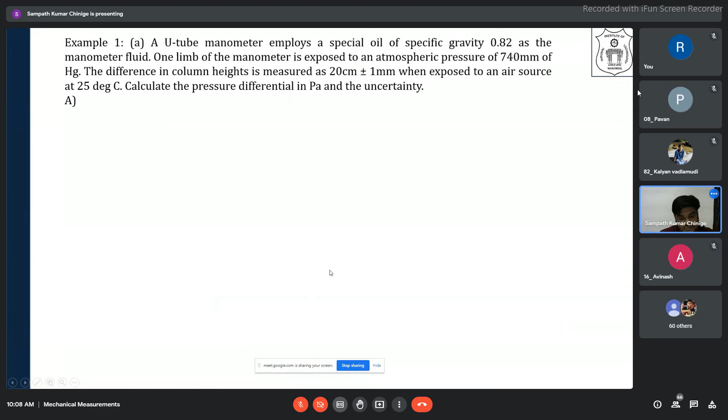Okay, so now any questions related to yesterday? Anybody? Please feel free to ask. Let me record the case. Please don't be silent, talk something. If you understood it, say that. Sir, you haven't shared the slides. That's true, but whatever you heard, you might remember, right?

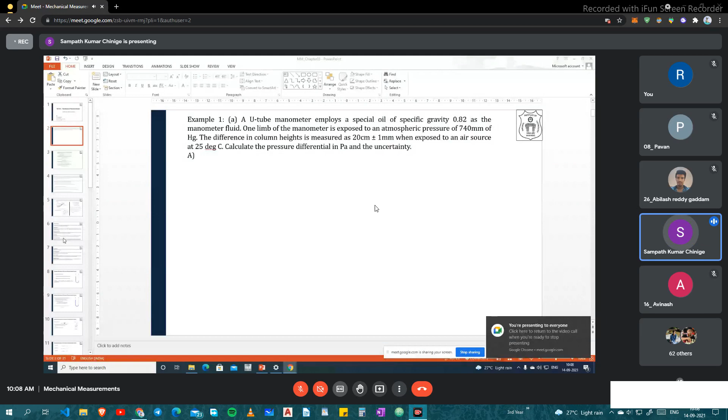Don't you remember what was taught in the last class? That's fine. If you don't remember, also that's fine. So I was talking about the working principle of the dead weight tester. Have you understood the working principle, how it is working for a calibration of any pressure instrument? Yes or no? Just for your sake, you tell me.

Somebody, don't wait for others. Those who have understood, at least they keep quiet, and those who never understood, you can say that I haven't understood. Okay, at least I can send the link. Please don't do so. Or those who understood, they say yes, one or two, that's fine. We'll go ahead. Okay. Can I take that you understood that?

And then the U-tube manometers, the manometric fluid we are using and balancing to find out the differential pressure. Have you found out that? Have you understood that?

Yes, sir. I request you people, don't be silent. I mean, it doesn't make any sense to me. You were talking a lot in the previous classes. Whatever you want to say, you tell from your side. Don't wait for others to answer. Okay? Have you understood? That's fine. If you have not understood, I can recap once again. No need?

No, sir. Okay, fine. So we ended up solving two problems yesterday. One is this problem: a U-tube manometer employs a special oil, with a specific gravity of 0.82 as the manometric liquid. One end of it is exposed to atmospheric pressure of 740 mm of Hg, and the difference in column heights is measured to be 20 centimeters plus or

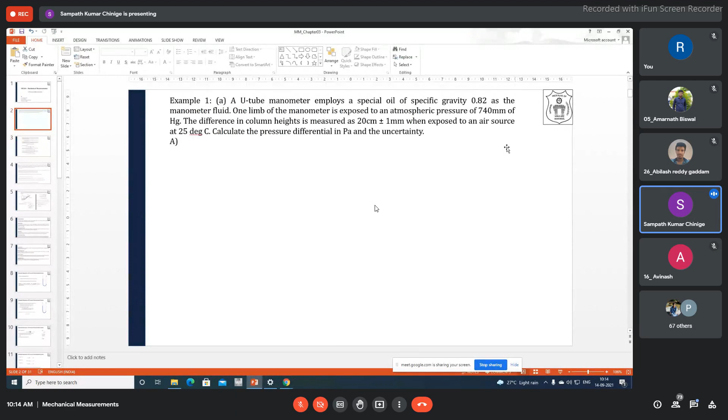Because in the question, we are finding out atmospheric pressure, and the other source is an air source. Therefore, you have to find out the density of air, rho air, that is 1.15. This we have got from finding out the actual pressure in pascals, and then we are using this ideal gas equation to find out this.

And then you have given the column height as 0.2, so substituting everything, P minus PA is equivalent to rho m minus rho f, that fluid, into g into h. So that is giving around 1598.5. If you put 9.81, it will be close to 1600, whatever it is. So whenever you are solving such problems, please mention these things clearly.

Okay, so the uncertainty calculation is straightforward. It is the same as the percentage uncertainty in the column height. So whatever the percentage variation in the height, the same will be conveyed in terms of your actual pressure difference. So the percentage difference in height is, for 0.2 it is 1 mm, that is 0.001. For 100, how much? It is plus or minus 0.5%.

So the pressure difference error delta P will be nothing but plus or minus 0.5 by 100 into whatever pressure difference we have got. So that is basically 7.99, which is close to plus or minus 8 pascals. So that is what the problem is. So I think you are clear with this.

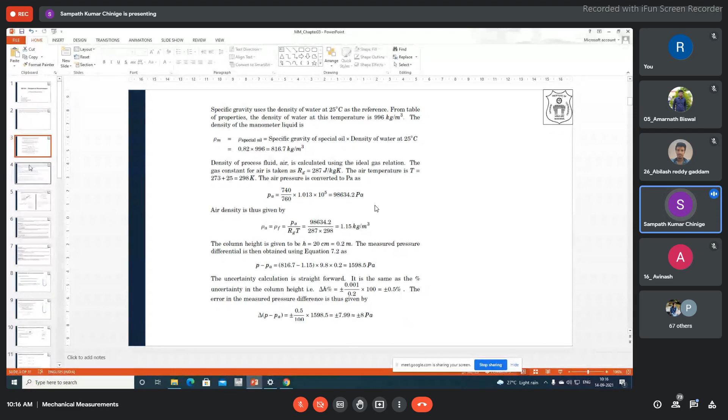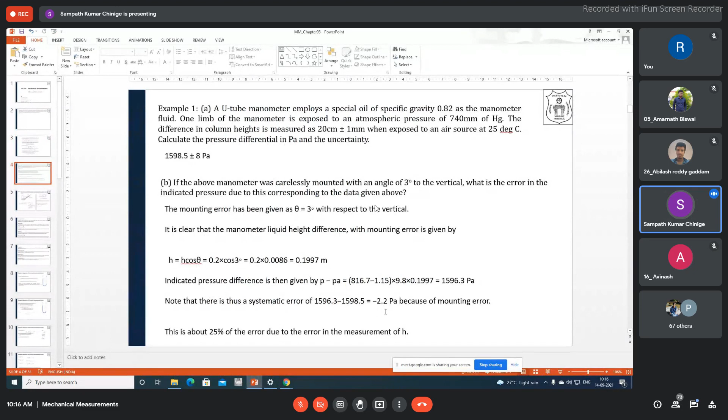And then the second problem, we have already solved it. When it is 3 degrees, we have to find out the height h is equivalent to h cos theta, based on the inclination. So from that, you got the pressure difference of 1596.3. When it is vertical, using cos 0, you got 1598 point something. So the systematic difference is 2.2 pascals because of this mounting. So I think you have got this problem.

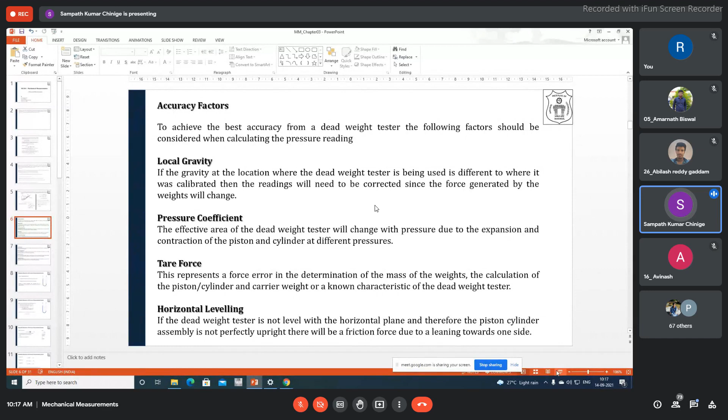Okay. Now today in our class, what you have to look at while using the U-tube manometers are the accuracy factors. Even when you are using the dead weight tester, you have to be very careful about the following factors. Number one is the gravity. Suppose you are testing your pressure gauge at one place where the gravity is different, and you take it to some other place where the gravity is different, then we will get some error, because gravity will have some effect on this.

Okay, because the force generated by the weights will automatically change. So therefore, the local gravity has to be the same. So when we are doing calibration, you have to do that calibration at the same place where you are actually using your experiment. Am I clear? So you cannot do calibration in India and then go to the Arctic and Antarctic poles and use the same calibration, because the gravity differs there. Okay, second one is the pressure coefficient.

The effective area of the dead weight tester will change with pressure due to expansion and contraction of the piston and cylinder at different pressures. So this is also one of the important things, where we have the effective area of the dead weight tester. What will you use the effective area for? So you are keeping the weights, right, on the base. How do you change that?

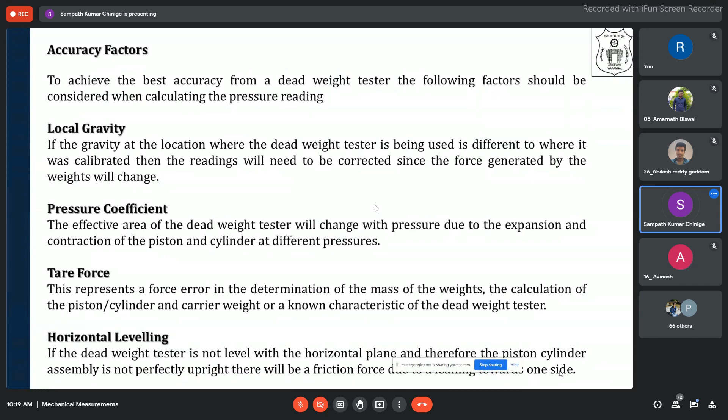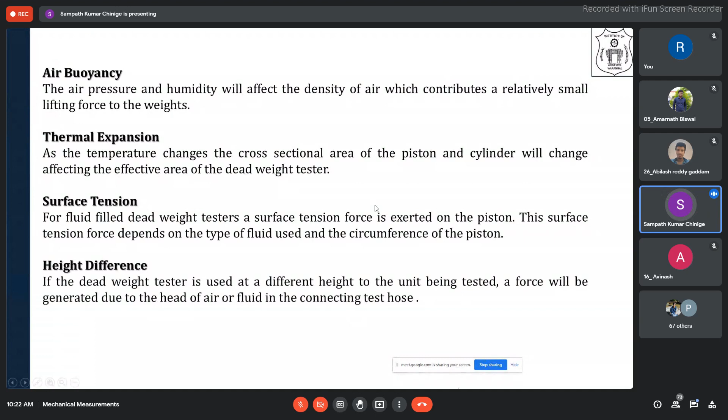Now let us move on to the next topic, what we call the dynamic response of pressure measurement systems. So far, what we have seen in the previous section is static, steady state measurement of pressure. We don't take the reading immediately; we wait for some time after the measurement starts, and only after that take the measurement. That is basically your steady state measurement. But how do these measurement systems behave in the transient? What is the dynamic response based on time?

For that, I'm giving you a small example of a simple instrument, what we call the U-tube manometer, where the transient response depends on several factors. One is the response of the transducer element that senses pressure. So it may be a sensor or whatever.

The first element, which actually senses the pressure: it depends on the response, how good it is, how sensitive it is. If it is very sensitive, for a small change of input it will give an output. So depending on that, its response will vary.

Second one is response of pressure transmitting fluid and then tubing. So whatever the fluid that I'm using within the instrument to transfer the signal from that sensor and continue to the other end. And what is the tubing, what is the interaction between the fluid and the tubing? How is this actually supporting the transformation?

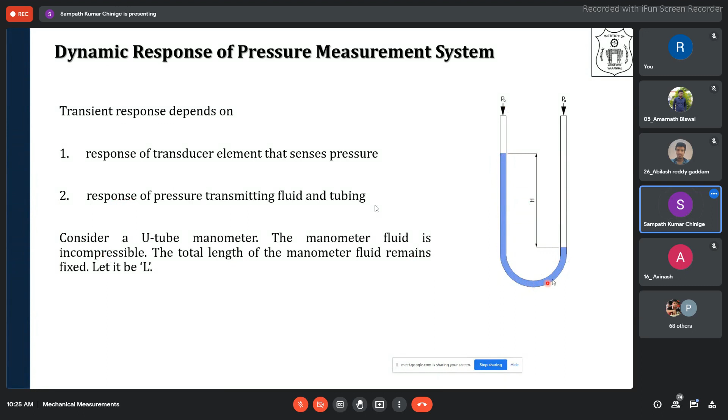So we will be just looking at a U-tube manometer, in which the manometer fluid is incompressible, that is the assumption, and the total length of the fluid manometer remains fixed. So the length of the total, not the variation in the height, from here to here, if you take it in a linear line, the total length of this column is capital L. And the difference in these heights because of the difference in the pressures is capital H, let us say.

So now let us understand what are the pressures that will be applied on the liquid column L. When pressure delta P is applied, what can be the forces that will be acting? What are the supporting and what are the opposing factors for the pressure? So the forces acting on the liquid column L: number one is the force due to acceleration of the fluid.

Because of this acceleration, there is some force that is being applied. You are connecting it to a tube and the water rushes with some force because of the acceleration. So it is the force due to acceleration of the liquid, introduced into the system. Correct? Agreed? And the second one is force supporting the change in height. There is a force which actually creates the change in height; I'm taking it as Fs.

The third one is force opposing the change. Again, there is inertia to the liquid which actually tries not to change the level of the liquid, opposing the changes because of the force. One is the weight of the column. So the weight tries to stop, it tries to balance the force.

The other one is the frictional forces due to viscosity. So what is the friction that is happening between the tube and liquid as well as the liquid layers itself? This will also oppose the fluid. So the more viscous the manometric fluid is, the more opposition it shows for the force. It will not easily move. It will not easily show the difference in the vertical height.

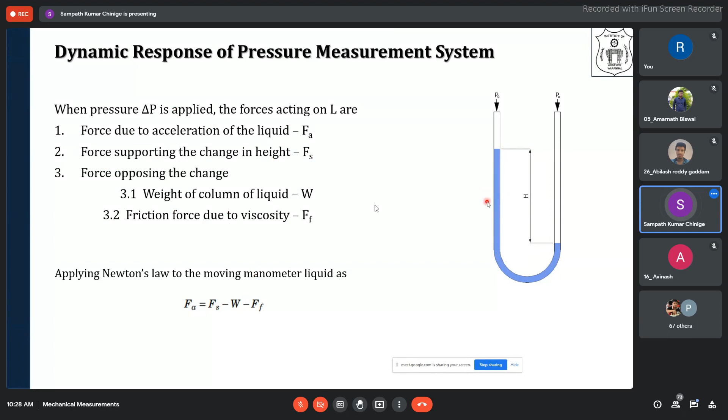Because of the rushing of the fluid, because of the high change in velocity of the liquid, it is creating some force. One is actually trying to change the length, the other one is its weight which is opposing, and the other one is viscosity which is opposing. Therefore, the force due to acceleration of the liquid FA is equivalent to the force which is supporting the change in height, minus W opposite force, minus F opposite force. So let us look at one by one.

So the first one is FA, the force due to acceleration, given by M into acceleration, right? Can we take it as M into A? Density is equivalent to mass per unit volume. Therefore, mass can be replaced by density rho m into volume. What is volume? Area of the tube into the length. So that is the volume of the liquid, right? So that is what I have written.

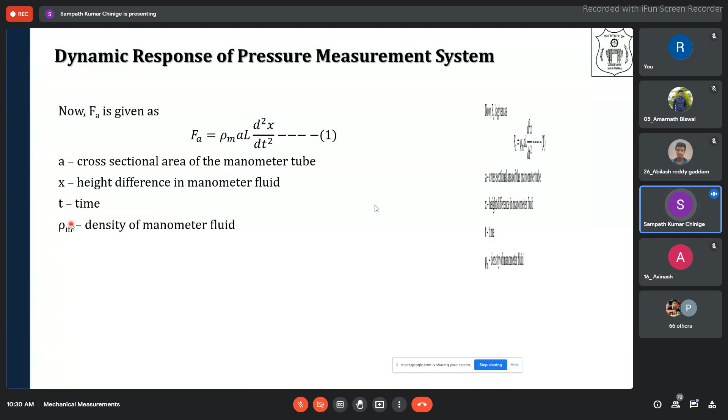Rho m A L, that is m, into d square x by dt square, which is nothing but your acceleration. Acceleration is equal to dv by dt, velocity is displacement by time. So it is nothing but d square x by dt square or d square h by dt square. So the definitions are written over here. Okay. So I have defined the first thing, the force due to acceleration of the fluid is equivalent to rho m A into L, that is my mass, into d square x by dt square, which takes care of the acceleration. So Newton's second law I have written.

So next one is Fs. What is the force which is actually creating that change? It is nothing but the pressure, right? The change in pressure is equivalent to the force per unit area. So I am writing Fs is equivalent to the area into delta P. Agreed? Okay. So delta P is Fs by A. So I am taking Fs is equivalent to A into the pressure difference. That is what is actually creating the change in height. So I have defined Fs.

Next one is W, the weight of the body, which is nothing but, as we have talked about, m into g. So therefore, rho m into Ax into g is the weight of the liquid, where it has a change, rho m A into x, or h, whatever the difference that we are taking, that is the weight of the liquid.

And viscous forces, this is like the area into delta Pf, where this pressure difference is due to the frictional force. How do you find out the frictional force? In your fluid mechanics, if you remember, we have used Hagen-Poiseuille's flow law, where you are finding out the equation for delta P. If it is a fully developed flow, what is the pressure difference, or the friction across the pipe? For a fully developed flow, it is given by Hagen-Poiseuille's equation. So that delta Pf is what is being incorporated over here. All right.

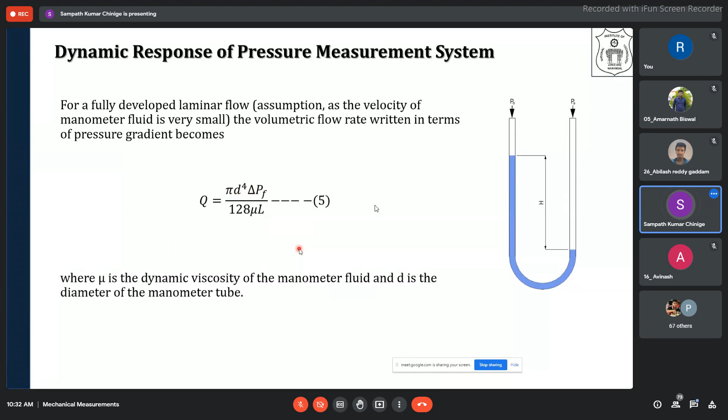Okay. So now here mu is the dynamic viscosity of the manometric fluid and d is the diameter of the manometer. So now what happens to the mass flow rate? What is the expression for mass flow rate? Mass flow rate expression is nothing but Q is equivalent to area into velocity. Okay. So your area into velocity will come into picture. So therefore,

you are writing like mass flow rate is equivalent to rho m pi d power 4 into delta PF by 128 mu L. Okay, so this is what its mass flow rate we are getting. Rho AV, mass flow rate is equivalent to rho into AV. Sorry, mass flow rate is equivalent to density into area into velocity.

What is area into velocity? That is basically your discharge. So that discharge is given here. Okay, this discharge I'm substituting there, multiplying with the density of the manometric fluid. So rho A into V, which is equivalent to rho into Q. That is my mass flow. So that is the difference. So when the discharge is multiplied by the density of the fluid, we will get the mass.

Therefore, delta PF in terms of mass flow rate, if you want to give, m dot 128 mu into L by rho m pi d power 4, where mu is the dynamic viscosity, d is the diameter of the pipe. So we got equations for everything. So the term 128 mu L by rho m pi d power 4, this term I am taking as the resistance due to friction. Just to simplify things, I'm taking this as a resistance R, m dot R, which is nothing but my fluid resistance due to friction.

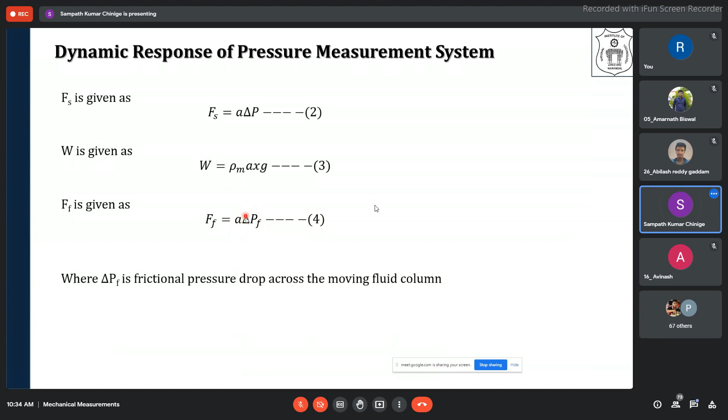So from the equations, what we can write, what is the force here? We have defined this force due to friction, or viscosity, as Ff is equal to A into delta Pf. I found out delta Pf in terms of mass flow rate into resistance. So A into capital R into m dot. That is what I have written, where R is my 128 mu L by rho m pi d power 4.

So the same thing I have written over here, A into m dot into R, where m dot is the mass flow rate. You can always write it as rho m A V. So it can also be written as density of the manometric liquid into area of the tube into dx by dt. What is the variation with respect to time? That will give you the mass flow rate.

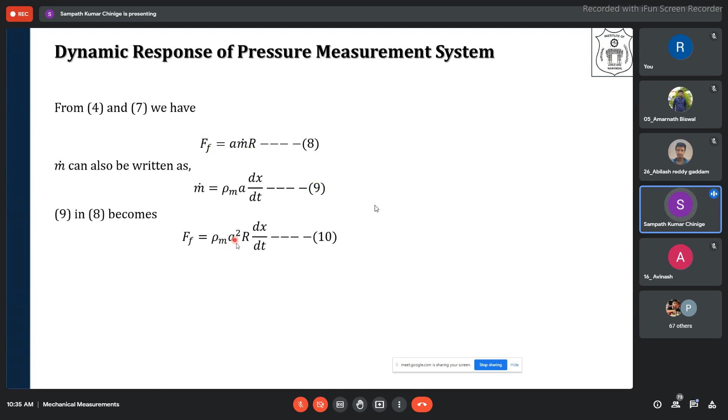So now substituting this into the expression, we will get the force as rho m A square R dx by dt. Okay, clear? Are you with me on this? Up to this, no doubt, I guess. So I'm just trying to balance the energies, nothing more.

Okay. So applying Newton's law to the moving manometric fluid, we have, as I already discussed, the force due to the acceleration of the fluid equivalent to the force which is actually creating the difference, which is the pressure force, minus W, weight of the fluid, minus the frictional force, which is actually opposing the movement of the fluid. Using the equations that we have got, Fa, the force due to acceleration, will be given by mass into acceleration.

Your mass is rho m into A L, into d square x by dt square. This term defines the acceleration. Fs is nothing but your pressure force written in terms of pressure difference into the area. Weight is written as rho m into A into, here you imagine h to be x, whatever difference it is creating. It's a variable. Here it is mentioned as a constant h, so it's just a weight. Minus Ff is the rho m A square R dx by dt.

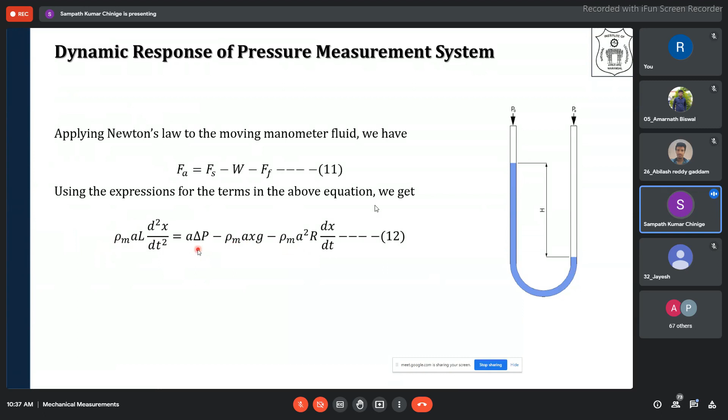Once we rearrange everything in the equation here, rho m A is the constant over here and here. If you rearrange that, you get an expression like L by g d²x/dt², a second order term, plus AR by g into dx/dt. This is one constant. A d²x/dt² plus B dx/dt plus x is equivalent to delta P by rho m. A second order polynomial kind of equation we have got. Okay, this is kind of a constant.

So therefore, we are defining here tau, the characteristic time, as 1 by omega n, where omega n is basically your natural frequency. Natural frequency and the time period are inversely proportional. Therefore I can write that it is basically square root of L by g. So I'm trying to define two terms over here. One is the characteristic time or time period, the inverse of natural frequency, which can be defined by root L by g. So tau, I am defining as square root of L by g.

And damping ratio, I am trying to define as AR by 2g tau: A into R by 2g into square root of L by g. Okay, so that is what I am trying to do. Now in the previous expression where you have L by g, I am trying to mark it as tau square, because tau is equivalent to square root of L by g. So therefore tau square is L by g. So tau square d²x/dt².

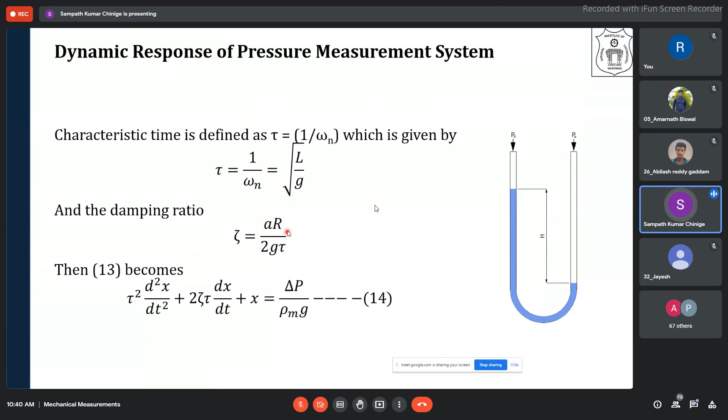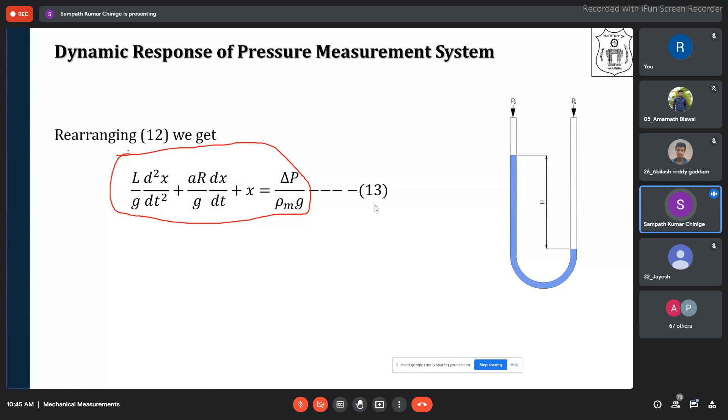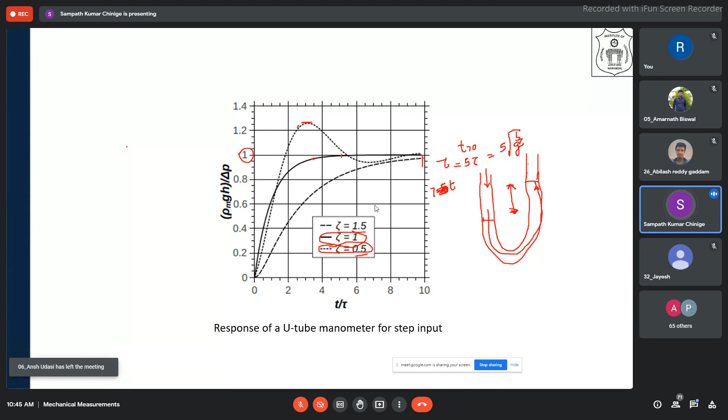Likewise, if you give a sinusoidal or harmonic input, how it will behave, I encourage you to understand that, but it will not be there for the examination. Up to this you can understand. So you can see there are 3 cases developed because of the damping coefficient. Now there is a question given here.

A U-tube manometer uses mercury as the manometer fluid, having density rho m of 13,580 kg per meter cube. The kinematic viscosity nu, given by mu by rho, is 1.1 into 10 power minus 7. The total length of the liquid L is 0.6 meters. The tube diameter D is 2 mm, which is 0.002 meters.

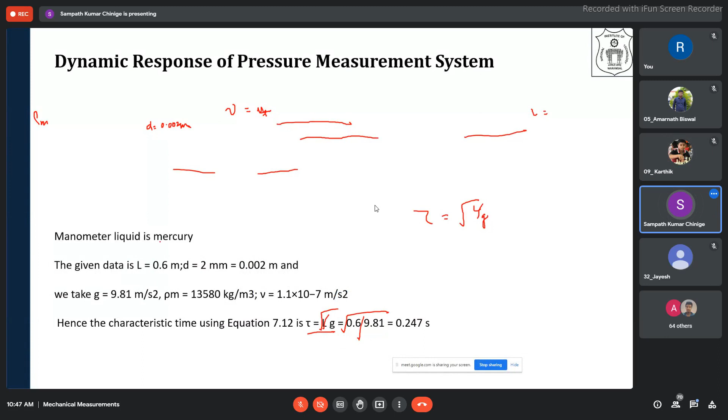0.6 divided by, and its product, right? Yes, sir, it's the same thing. It's the same thing, right? So first thing is, we have found out the characteristic time.

What is the damping ratio? The damping ratio formula is again given. We have to find out first the resistance calculation. The resistance is given by 128 mu L, that expression, right? So using that, you will find out the zeta value.

So now zeta has been found out, and for the system it has come to be 0.109. So therefore, it is an underdamped system. So that is the first calculation. Second, they are asking us to take the manometer liquid as water, and then find out the same things.

R H2O, and this is R, resistance, for Hg, mercury. So that is what my convention was. Resistance of Hg I found out, and then I used that to find out the area, pi d square, and then the damping ratio. What is the damping ratio formula that we have used over here? AR by 2G tau. So tau we have found out.

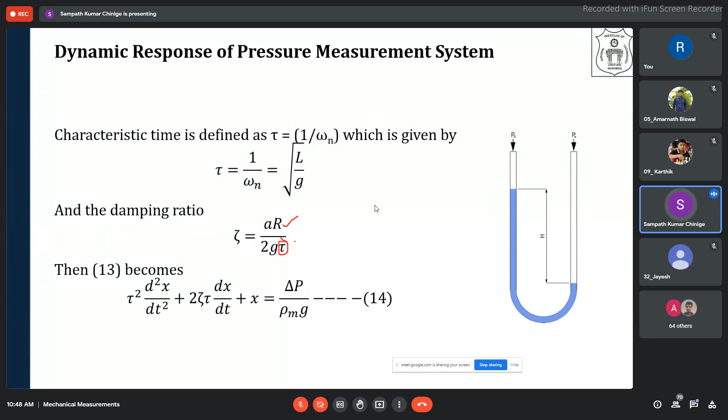We have to find out what is R, the resistance, and the area we know from the equation here. So when we substitute that, we will get the value. Please solve that after I share this with you. If any mistake is there, please let me know.

So after doing this, it is 128 mu L q. You have to use 128 mu into L, and the area is pi d square by 4. So if you put that, you will get the damping ratio value as 0.109, which is underdamped.

That means the liquid column tries to oscillate a little bit. There is an oscillation here and here, and finally it gets settled at this equilibrium position for the distance h. So oscillation will be there.

The same thing we have to calculate for R H2O, water, and then tau. And they found out that the system is very nearly critically damped. It's almost equivalent to 0.99. That means it is almost close to 1.

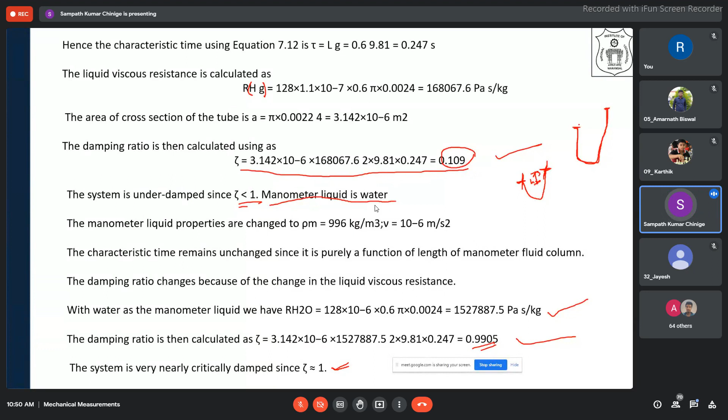So instead of this liquid, if I use water for the same pressure, what is the observation that I can make? This will go very slowly up to around 5 tau, 5 times the time constant or characteristic time. I can take the values because it comes to a steady state. Very easily I can take the readings. That is the point. So that is all about the dynamic responses and the response of the instrument.

But I would like to go beyond this. The next topic, according to the syllabus, is vacuum pressure measurement. But I wanted to explain the other topics also, like how you measure pressure with a strain gauge, and bellows pressure measurement. Those topics also I want to cover. Once I cover those, we will move on to vacuum pressure measurement.

So up to this I would like to finish those topics and the vacuum pressure. In the next class on Friday, we will try to finish these 2 topics. One is the vacuum pressure measurement, as well as other few devices which are helpful for us to measure pressure. Those are the 2 topics I would like to cover.

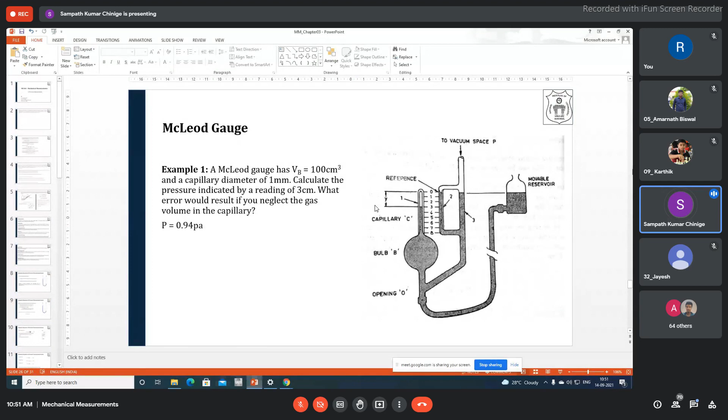Yes, sir. What are the applications of an overdamped or underdamped U-tube manometer? Where are we using overdamped, or where are we using underdamped? It is a kind of design consideration. While designing, you have to understand. Suppose you are using the instrument to measure some pressure. You should be aware of what time you have to take the measurement properly. Do you want it to come linearly, or do you want it to oscillate? You don't want your manometer to be oscillating.

It keeps on oscillating with the levels, right? So you want to quickly come to a particular steady state, correct? So using this tau and LG, you will be able to find out what diameter you have to use for the U-tube and what fluid you have to use to make sure that it is critically damped. That is my understanding. Okay, so that after some time it comes to a steady state.

If you look at the others, if it is underdamped or overdamped, what is happening? If it is overdamped, the response of the instrument is pretty slow. It is not coming to a steady state for a long period of time. If it is underdamped, what is the problem? We are having a lot of oscillation. It keeps on oscillating. How do you take the reading? If it keeps on oscillating, what is the correct position? You never know. Therefore, it creates a lot of errors.

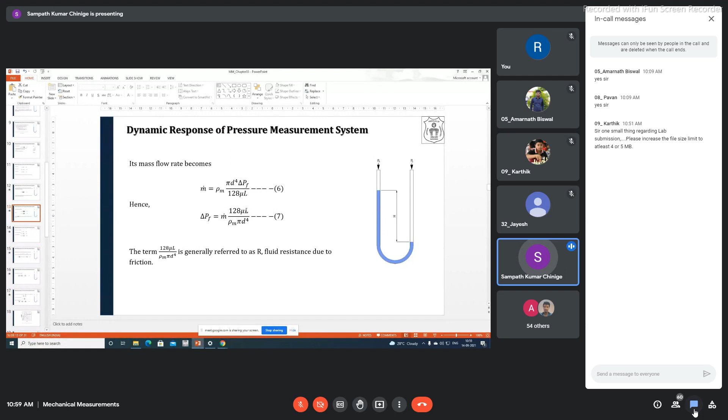And what is your R? Your R is basically this 128 mu. Mu is what? Your viscosity of the liquid, density of the manometric fluid, and again, diameter of the tube is also in the picture. Suppose if you are taking the area as constant, d will become constant, but your mu and density will keep on changing. So which mu and which rho and what is the length? These are all the design parameters. So playing with that, you will try to come here.

You will be trying to get close to proper critical damping, such that after a certain period, I'm pretty sure that you already studied this, at 5 tau, 5 times the time constant of the instrument, I am getting a standard value. So it's easy for me to take the reading manually. Clear? Yes, sir. Thank you. Yeah, any more questions?

So please do problems. See, somewhere I'll pick the problems and I'll give you. Later, I mean, from the syllabus itself, not weirdly from somewhere, but I'm telling you, I cannot solve so many problems in this classroom because there's a lot of theory to be taught. So please go through the most number of problems because it's an open book kind of exam where you'll be seeing the textbook or other materials to answer. So make sure that you go accordingly.

I mean, you be prepared for this type of questions, right? So most of the questions I'm solving over here. So please, from your side also, put some effort. After this, whatever we are teaching, it's all directly related to the theory, which you can just Google and then write in the examination.

But somehow I want you to look at the problem so that we can differentiate the students. I am of the opinion that if you were in the classroom in the offline mode, I might have given: write the working principle with a neat sketch of a U-tube manometer, discuss the dynamic response of a U-tube manometer for a harmonic input. I might have given and asked you to do that. But since it is online, I cannot do that. So I have to do some problems. So please be prepared for some of the problems to be solved.